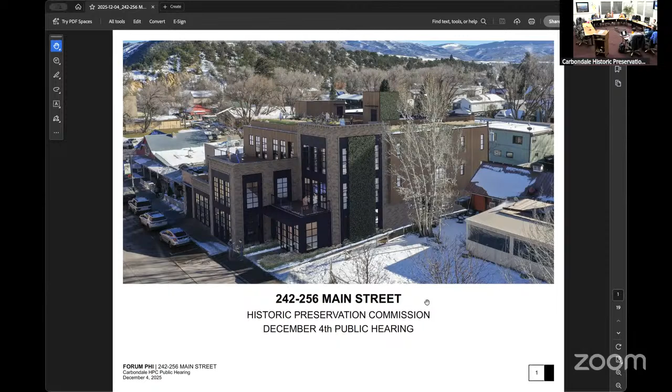Ellie mentioned the existing building dates to 1974, right next to the Smithy, which is the component we're leaning pretty heavily into and doing our best to respond to, knowing the importance of that building to the community. The proposed building is a 3-story structure.

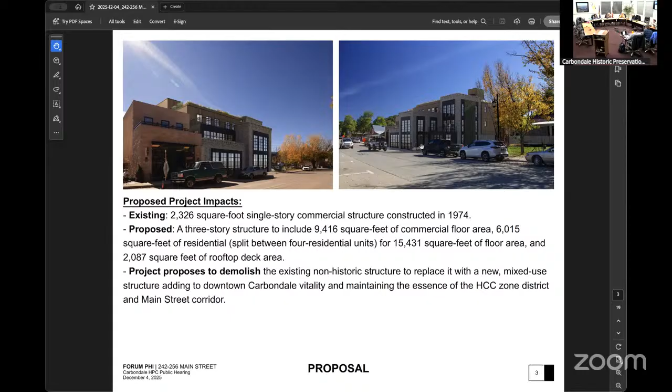15,000 square feet of floor area and a 2,000 square foot roof deck. The floor area interior is broken down into about 9,000 square feet of commercial floor area and 6,000 square feet of residential floor area, broken up between 4 different residential units. As Ellie pointed out, the proposal is to demolish the existing building to build the new structure.

Jumping into the historic preservation design guidelines, starting with site design. The building does adhere to a 0-foot setback at the front to respond to the historic context there. As I go through this presentation, I'll call out page numbers. Right now I'm on page 4, discussing site design.

A recessed corner entry off the northwest corner, with the intention of most foot traffic coming from the west to the building, and also trying to respond to the green space that is the Smithy lawn next door. So softening that edge for pedestrian entry and creating a pedestrian transition between Main Street and the building.

Parking is all provided off the alleyway and serves the residential use. There's no requirement for commercial parking in the HCC.

The goal here is to minimize the impact to the landmark structure at 26 3rd Street, which is the Village Smithy. The intention here, we've got one building setback—not that it's required—but on the west side of the building, a pathway to get from the front of the building to the back. So we've moved our building with that pathway as far away from that shared property line as possible, or as feasible for the design.

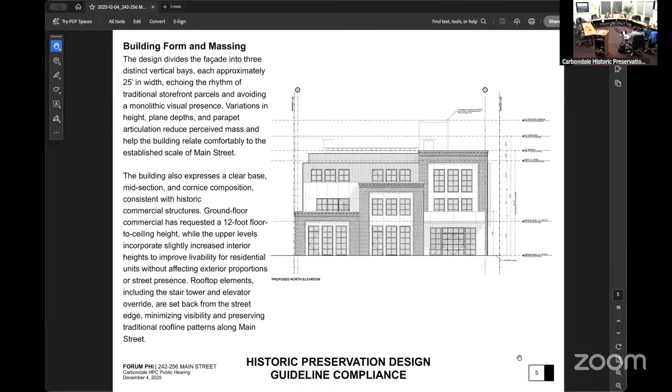Page 6, talking about architectural details. The goal here is incorporating extensive glazing, but treating those as punched openings as opposed to more modern storefront. So it's responding to the historic context without trying to act like it's a historic building.

So it's toeing that line between fitting in and also helping everybody understand the time and place of the building. The articulated storefront and recessed entry are all components of that front facade, a lot of it aimed at engaging pedestrians along the street.

Predominantly materials are brick masonry, with secondary materials of metal and wood, especially at the ground level. The components of the building facing the street are mostly brick, which fits into the historic materials of town, with some secondary materials showing up as the building steps back.

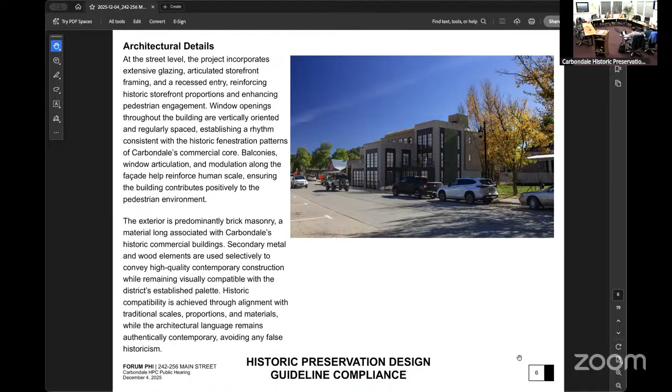Page 7 deals with accessories and appurtenances. There's no signage proposed at this time, but if that comes up, we'll respond to the guideline requirements of high quality metal materials, illuminated discreetly. All mechanical equipment and solar panels proposed for the building are on the roof deck and in the rear two-thirds of the building, fully screened from view from the street and pushed as far away from public access as possible. All lighting would be dark sky compliant and shielded from view.

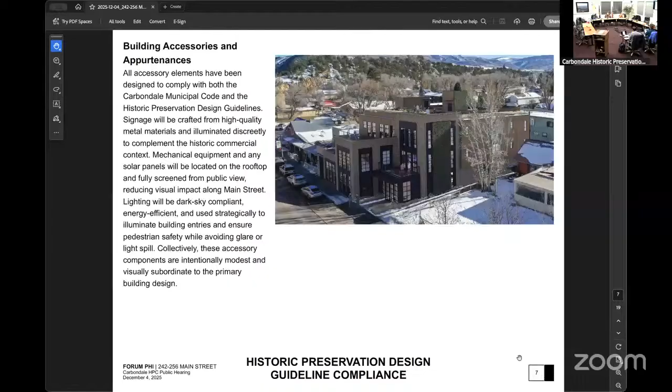That addresses the four sections of the historic preservation design guidelines. Page 8 shows a few different renderings of the building, a couple from Main Street, and one looking at the Smithy building, looking to the east.

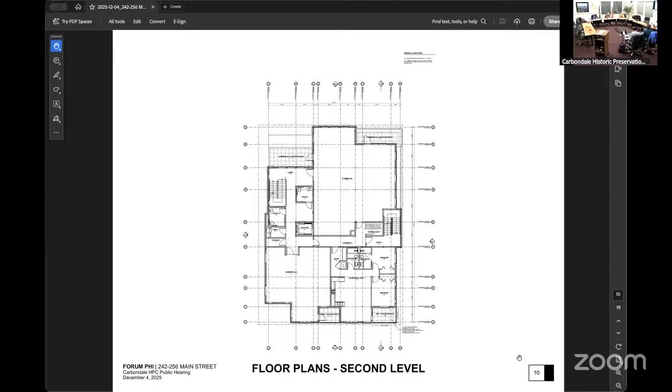Pages 9 through 12 show the floor plans, which we don't need to get too bogged down on tonight, but just to give an idea of how the interior is laid out: the main level is commercial with garages off the alley, the second floor is a combination of commercial and residential, and the third floor is entirely residential. As stated, there's about a 2,000 square foot roof deck on the roof.

Moving to page 13, just a quick snippet at the front of the building discussing materials: primarily brick veneer with complements of wood siding and metal paneling, with metal paneling mostly surrounding windows.

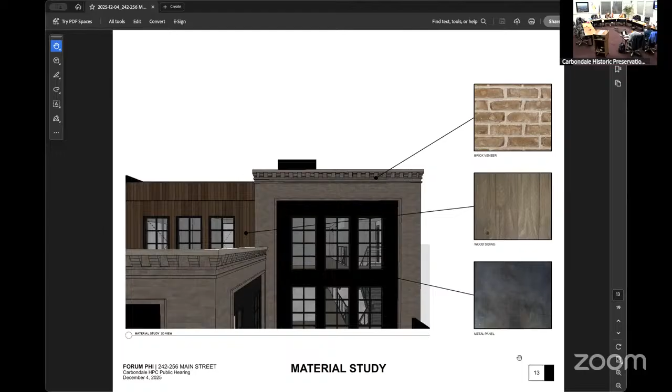Page 14, we felt these diagrams were important, even though they're not technically part of the HPC requirements, discussing solar studies or shading diagrams as they relate to the Smithy, knowing that one of its greatest features is the yard and how that's used, especially during summer months as people wait for tables. The first top right image shows the shadow cast at 9 a.m., which is fairly minimal from our building. As the day moves along, you can see how that sun study and shading moves away from the Smithy. Care has been taken to make sure the building responds accordingly to the neighboring property, making sure we're not adversely affecting especially the yard.

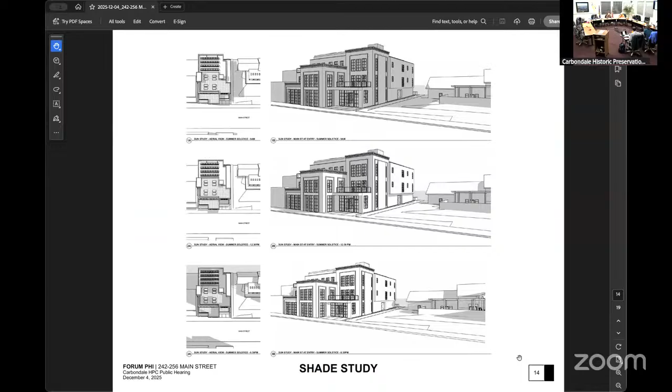Page 15 is the first alternative compliance request. As stated, this one is the change from a 14-foot floor-to-floor to a 12-foot floor-to-floor. The bottom two diagrams show this: the one on the left is the 12-foot floor to floor, which is what we're asking for, and the image on the right is the 14-foot required. The goal is to create a band on the facade of the building so there's no distinction between a 12-foot or 14-foot floor to floor, with the only change being on the interior of the building. With this being a 3-story building adhering to height limits, that change from 14 to 12 allows for much better interior space on the second and third floors.

Especially the second floor with the residential unit at the back of the building, and the third floor being entirely residential, the goal is to create better, more livable space in the downtown core. Without that exemption, the two floor plates get pretty squeezed together, and we'd have to make adjustments just to get what we'd consider livable space. We're really talking about ceiling height: in the 14-foot floor to floor, our ceiling height is down to about 8 feet, but with the alternative compliance, if granted, we're at about 10 feet floor to ceiling.

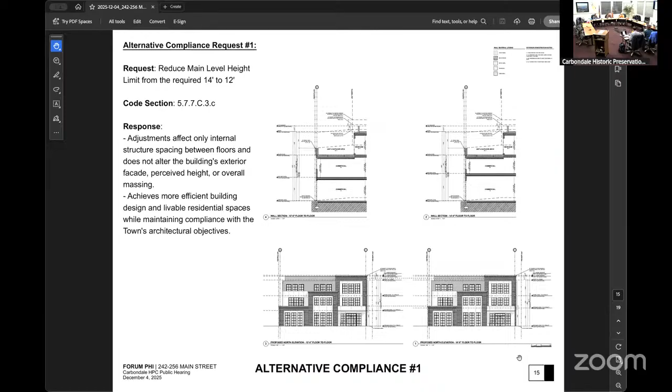Alternative compliance request number 2 is the height limit change from 35 feet to 42 feet. We've provided two diagrams here. The black section diagram shows the building with the alternative compliance, so this is with the 42-foot height exemption. The red overlay shows if we adhere to a standard height exemption of 35 feet.

The only two items that go above and beyond that 35 feet, if a 42-foot exemption is granted, are the stair core and the elevator. So the best way to think about this is 42 feet is the top of the elevator core, and the elevator's overrun requirements actually set the roof deck level. You start at that 42 feet at the elevator and work your way down to the roof deck, and overall it pushes the roof deck down by about 2 feet.

So it's an alternative compliance to ask for a greater height limit, but what it in effect does is reduce the overall height of the majority of the building. It would just be the elevator core and the stair that go above that 35 feet. So by granting it, you'd actually be pushing the building down by about 2 feet overall, which, going back to the sun study, every foot you push the building down is a foot less of shadow cast on the neighboring building. I think we can come back to this since there are probably more discussion points, but I wanted to present those diagrams so you understand what they're showing.

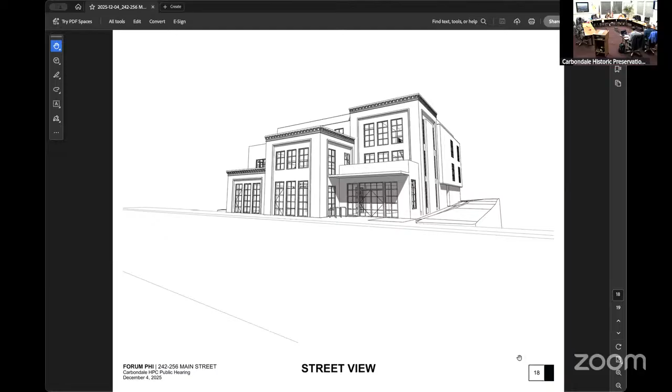Page 19 is just a quick summary to close it up.

Any clarifying questions as we dive in? Questions from the commissioners to the applicant?

So with alternative 2, or variance 2, you said you're actually going to lower the building height 2 feet, so it's going to be 33 feet in height instead of 35. If you allow the stairs to be 42 feet, you're saying you're lowering the actual building height by 2 feet.

Correct. Let's start with the standard height limit. At 35 feet, that would be the roof deck level, and the parapet is allowed to project beyond that 35 feet by 30 inches. By going with the alternative compliance and starting at the elevator roof and working your way back down, it pushes the parapet and that roof deck level back down 2 feet. So the roof deck itself would be about 33 feet.

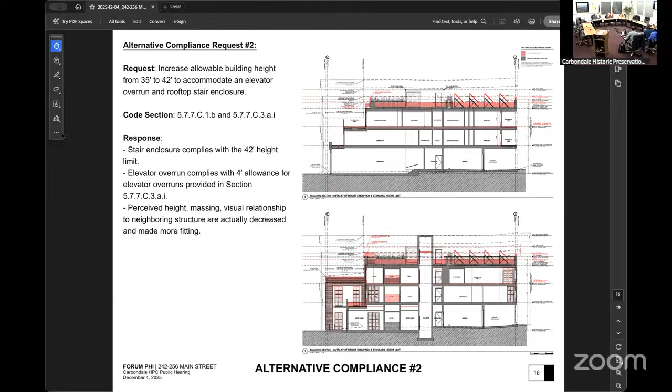So I felt it important to point out that we're not just asking for a floor-to-floor exemption to create much better space, but that from the street, it actually equates to a building that looks very much the same. There's no visual impact from the street.

The second point I felt was important to present here is what it does to the overall massing of the building, reducing the scale and overall height. I know it's a bit of a mind bender to think about starting at the elevator and working your way back down, and how an additional 7 feet of height can actually reduce the height of the building. But that's the point we wanted to hammer home, and on page 16 we show this overlay so it's understood that the alternative compliance makes for a shorter, less impactful building to the surroundings.

And that's tying back to the design guidelines about fitting into context. I mean, the design guidelines don't say it explicitly, but it's about trying to be a respectful neighbor.

You're basically about the same height as across the street at DHM and the other Coventure building on the other side. Do you think it's an improvement on the side that shows the Smithy compared to what the DHM building has? The other one is just a flat brick with punched-out windows. Yours has a break of material, which I do like.

Yeah, and like I said, the stepping back—if you go back to the design guidelines, it's not just taking a building up to the 27-foot height limit within 20 feet of Main Street and drawing that diagram back and going up to 3 stories from there. There's a lowering of scale, and the only component of the building actually reaching its max height limit within the first 20 feet is the middle third of the building. So it's stepping down—both stepping back from the street and stepping down from side to side—trying to respond to the buildings around it as best we can, and exactly what you just said, not creating a straight wall up to 27 feet.

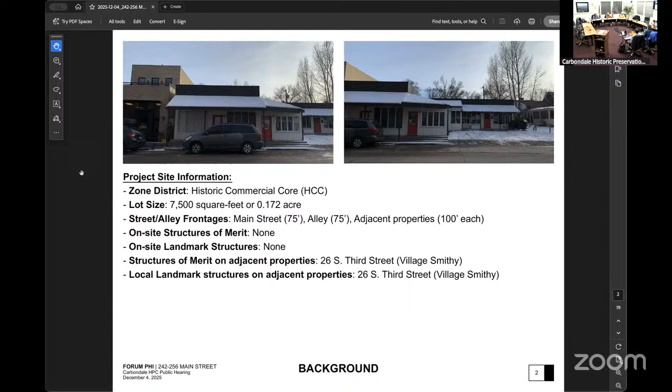I know the building height is going to be discussed by the P and Z, but it is part of HCC's design guidelines, and I still am kind of baffled how we're losing two feet off the building height, but by reducing the 14 down to 12, you're putting that two feet into the ceiling heights. So that's really keeping the roof level at 35 feet. You're not actually lowering the roof level down that much, so I'm not really in favor of compliant, the variance number two.

Concerning the overall building, it's just a huge bunch of mass where the buildings on either side of it, and on the whole block, aren't anywhere near that. It just doesn't fit with the historical commercial core of that block of town. That block used to be kind of the center of town. The town's expanded and it's growing up to 4th Street too now, but it's just such a huge amount of building there, going right next to our classic Village Smithy restaurant, which is basically one of the major faces of Carbondale. It just doesn't fit in Carbondale. It's so big and massive, a blob.

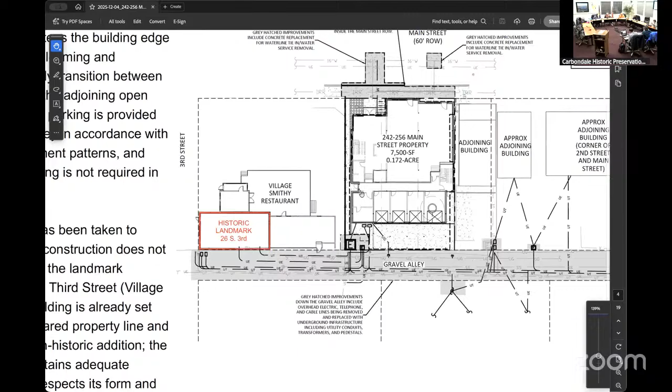That massive western wall facing the Smithy, it's a nice idea putting plants up going up the wall there, but it really doesn't block off the fact that it's a 37.5 feet high wall, almost the entire depth of the lot. Yeah, we should check into that.

Structures next to structures of merit. I can't think of it off the top of my head, but I can do a quick search for it right now. When's this gonna go to P and Z?

We don't have a date set yet. We need to answer that question before it does, please. Okay.

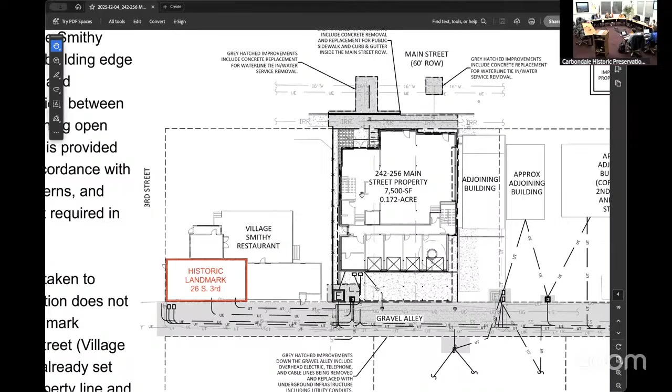Yeah, I just think it's inevitable that that fourth story is going to be visible, but it's just massive. And it's quadruple the size of what's already there, almost 10,000 square feet. Plus the roof.

Yeah, if they eliminated the rooftop and put that park facility on one of their lower decks, and maybe put them out to the side, it would kind of cut up the massive size of the west wall. They wouldn't have to ask for a variance. We could stay happy right at the building height, which is really asking a variance for changing the building height in the downtown area - that's a huge request. It's not like you're asking for something teeny tiny. Building height is one of the major issues with all the buildings on Main Street.

You could do what you did to the front with a terrace, kind of go around the side and the back. Still get good views of Sopris, still have your happy little deck top outdoor park areas. You just wouldn't need an elevator or a set of stairs to get to them, and you wouldn't need variances. That would make it less of a blob. Yeah, because it looks like the outdoor deck for the second floor is just for residential unit 4. Well, 3 and 2 gets really tiny ones.

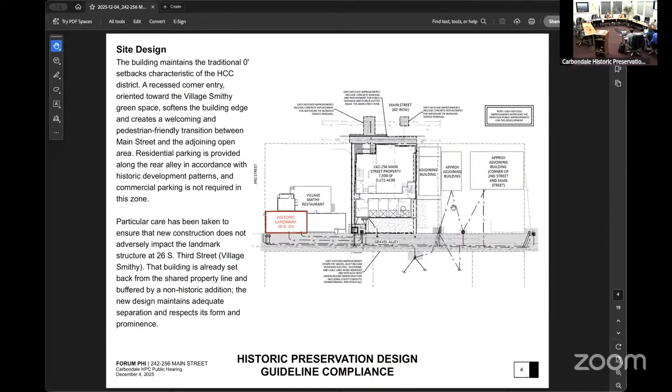Well, my take on it is I'm really glad to see, from the first go around, the introduction of brick and the cornice detailing that you've got. That was a really step in the right direction for developing compatibility with commercial buildings on Main Street. And I think you have tried to, by breaking up the front facade into this tripartite scheme and stepping back from the front, help reduce the massing effect of the building.

And I understand the value of property such that you want to maximize your building and building size. But it is a big building, and it's adjacent to single-story structures of merit. Down the road, the possibility of a large building being built in the Smithy's yard is possible as land values go up - no, it's not, John says it's not - but so that, in the future, if a building were built, that would help the western facade. But that western facade is going to be really, really visible for a really long time. And it's big.